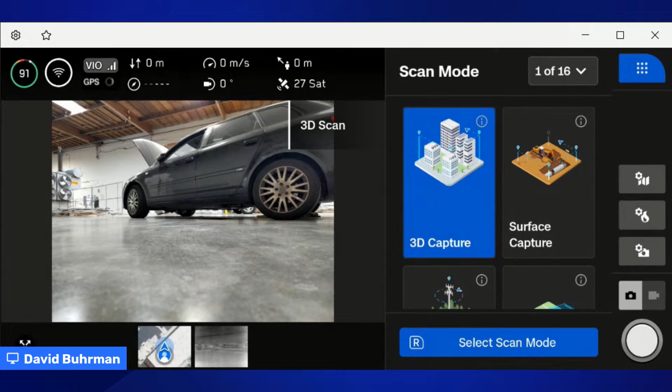Awesome. I'm very excited to talk about 3D capture and how easy, safe, and affordable this is to use. So many things you can do with this to speed up the capture of your scene and get an accurate representation. So what my partner Dave is doing in the warehouse right now, he's labeling this crash scene.

Normally, as a crash reconstruction person, you would want to put your case number or description there of the scene that you're about to capture. So Dave's going to go ahead and lock that in, and we're going to move forward through the mapping menu here.

So Dave's about to launch the aircraft. The aircraft's going to do a quick 360 calibration turn, and now he's going to be able to go right into the return behavior. He's going to set the launch point. Now he's going to set the floor.

A lot of ways you can do this. You can use the default. Dave right now is setting a custom default. He's lowering that floor below the level of the vehicles there. So by dragging that artificial horizon down, he's able to make sure that the cameras are going to capture everything at the ground level, all the way down to the wheelbase. So if there's any crush damage along the side, that's going to capture in each one of those photos.

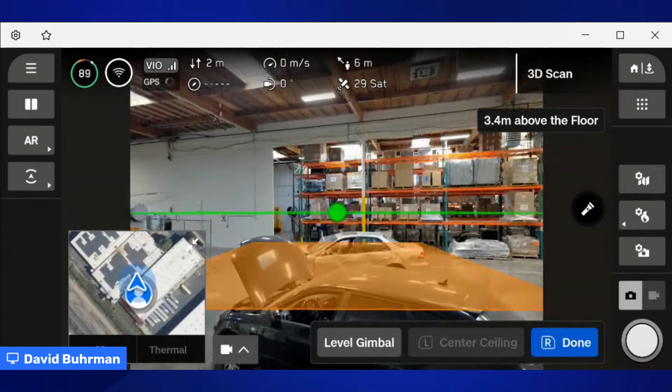So now Dave's going to set the ceiling height, and all he has to do is fly just above the height of the vehicles. He can raise and lower that depending on the environment he's in, if you wanted to get greater context of a taller vehicle, anything like that. So he's got that locked in. Now Dave is going to set the boundaries, very simply, dropping a number of pillars all the way around your scene.

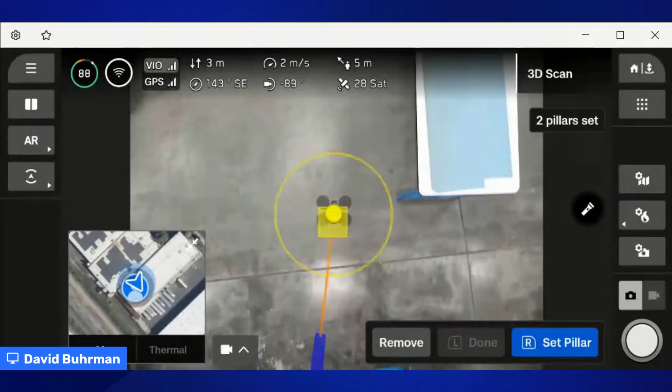3D scan requires a minimum of 3 pillars. However, Dave is probably going to go around and set a number of pillars to ensure adequate coverage and that we're not encompassing anything that doesn't need to be in the capture. So while he's doing this, we're ensuring we're getting distance away from the vehicle, but also getting all the detail we need, nothing additional that's unnecessary in the scene. So he's locking that in. Looks like we've got about 6 pillars now, 7, and he'll be done momentarily.

All right, so we've got a completed perimeter setup right there. Now, if Dave needed to, he could extend that volume outside of what he just dropped those pillars to, but we don't need any additional area outside of that for context. So now we're looking at the strict geofence.

If we had active traffic nearby or overhead on an overpass, we could set those various ceilings, floor, or wall to ensure the drone doesn't pass outside of that space. Dave's got a safe distance of about 2 meters away from the vehicles and other surfaces there. He can set that up or as low as he needs to ensure the drone stays away from potentially blowing away any evidence with prop wash.

So we're going to leave those geofences off. He's going to move right into the review suggested augmented reality observer point, very easy to do. The drone's going to give us a quick glance of where things are at. You can also set it manually for your preference and see that view of the entire capture area while the drone is flying.

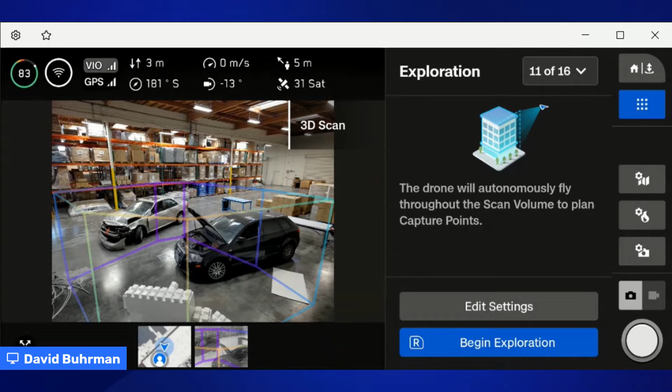Now that he's got that set, we're going to go right into begin exploration phase. This is the point where the drone flies around the crash scene and starts building a mesh, making calculations and decisions on how much data we need to capture to achieve the ground sampling distance we need for the level of detail we want in the final rendering.

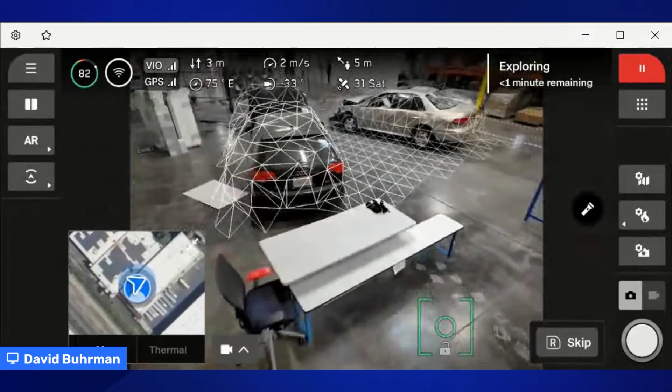So now the drone's nearly complete doing that. We've got a little printout here showing the drone is going to capture about 123 photos, 1 battery flight time, and we can go in and change any of those settings. We've got 1.0 millimeter ground sampling distance, that was in that top corner. So if we needed to, we could adjust that. Dave can also dial that distance to surface up and down to change the ground sampling distance.

We've got good 70-80 overlap in that middle figure there. That's typical for most crash scenes. You could even bump it up as high as 90-90 if you needed to, but Dave can keep that down at 70-80, and we'll have adequate coverage for our model here.

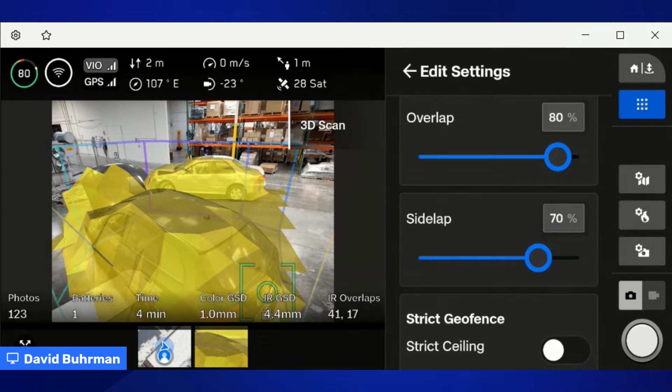Again, you've got the option to click on those strict ceilings, strict floors, strict walls for geofencing in case you've got active traffic in another lane adjacent to you and want to make sure the drone doesn't fly over there where it doesn't need to be. And then obviously your safe distance.

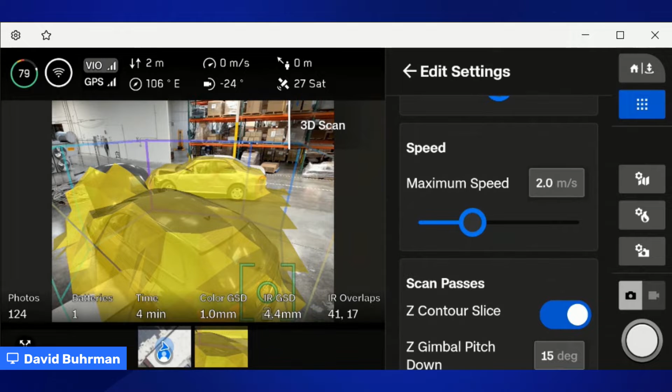We also have the option further down to adjust our speed. Right now at 2.0 meters per second, this is probably typical. You could even lower it down a little if you needed more time in between those captures. You can also change your Z-axis pitch, your Y and X contour slicing within that scene. So if you've got a lot of vertical surfaces like the side of a semi, or the top side of a vehicle with additional evidence up there that needs captured, you can turn those on or off.

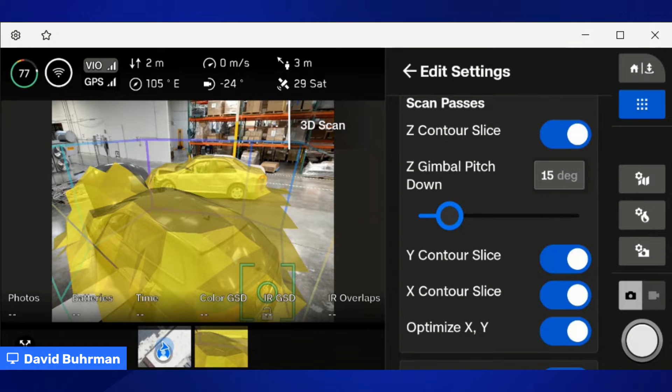Rolling down a little further, taking best photo. I think this is always kind of a no-brainer, but you can set this for stop for photo as well. Having that stop for photo option gives you a little extra clarity on each one of those photos if you decide to set that, and that's going to help keep a clear image of your final rendering.

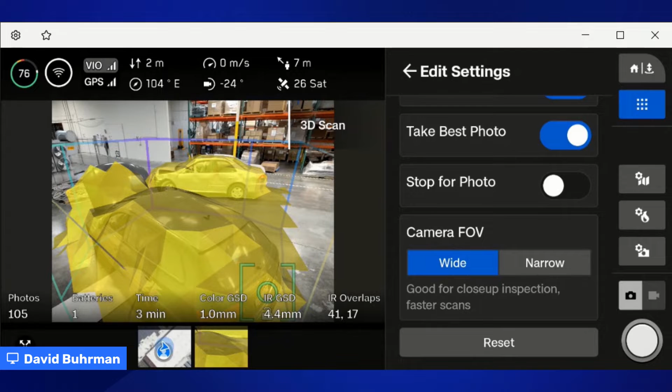And then obviously the camera field of view, if you want to use wide or narrow. This is good for close-up inspection and a faster scan with the wide angle setup here. So I think we're all set to go. Dave's going to hit begin on the scan.

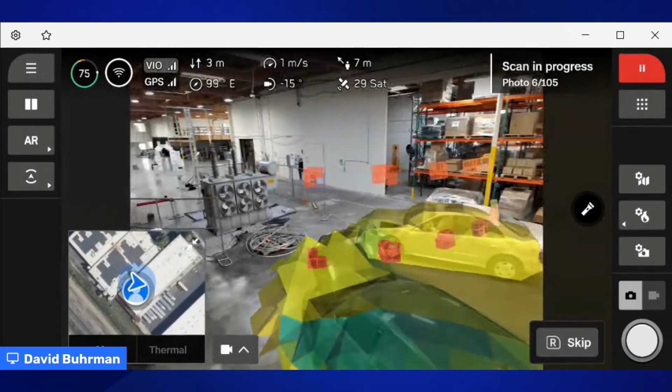So now the drone is going to start doing its initial pass. The drone will actually start to make a circular pattern around the vehicles, capturing that area. And as you can see, that yellow mesh is actually changing colors now.

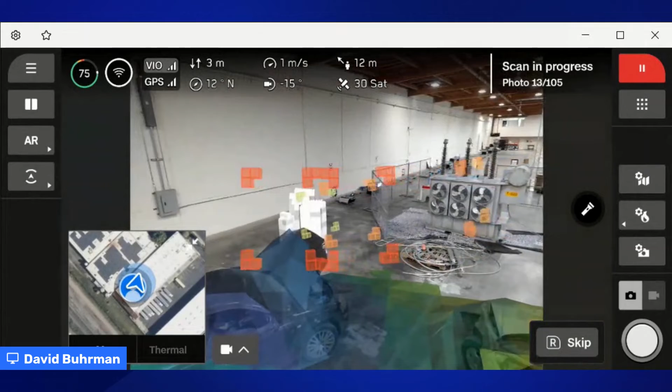It's starting to go from yellow to green to blue, and then eventually it will change that color up to purple, showing saturation of photos in that area, ensuring that you've got good coverage within the boundaries that you set earlier with those yellow pins.

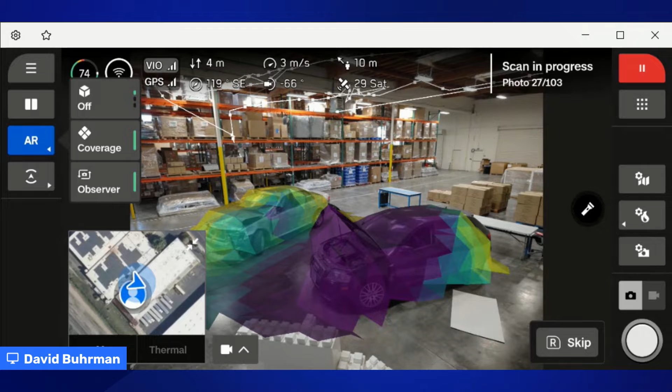And as the drone is going around, we're already moving through, we've got about a third of the photos already captured. X10 is extremely fast, and so is X2 and S2 at doing this 3D capture. So the platform works the same on all of our drones. Very easy, very safe, and this ultimately saves you time, and time is money.

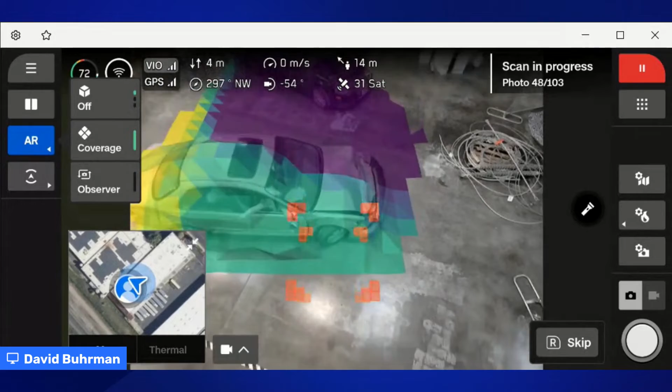We all know that. So clearing the crash scene and getting a fair and accurate representation is the most important component here. And then obviously officer safety and the safety of all the first responders affected there in that crash scene. We want to ensure that we're minimizing the time needed there to capture the data and get good quality data for our final rendering. Ultimately, this data could go to court, and we want to ensure we have an accurate representation of that crash scene.

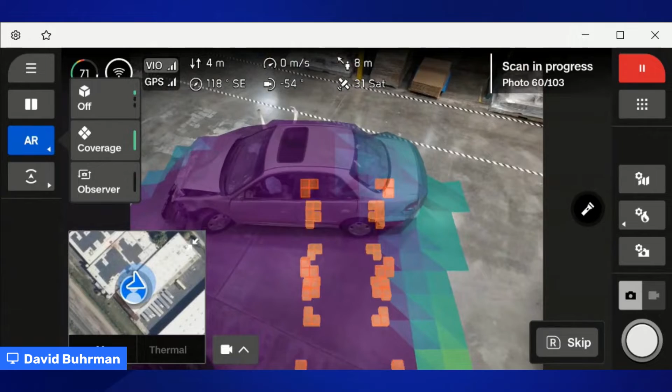So right now the drone is starting to make its final pass to get around. Once it completes this final run here, it will make a 90-degree turn and start making continuous lawnmower passes in the opposite direction, at a 90-degree direction to where it's traveling now.

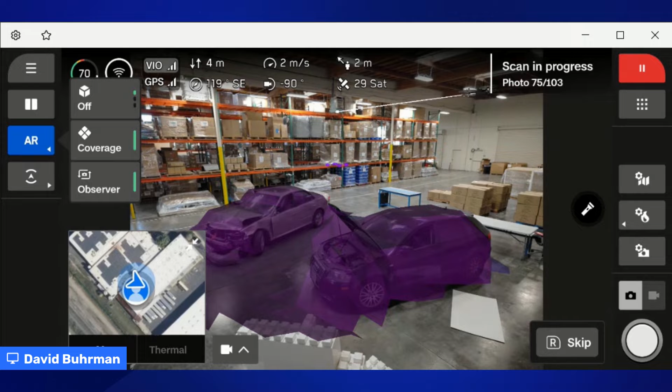So all the while this is going, Skydio Autonomy is acting in the background at the same time. There are 6 4K cameras, 3 on top, 3 on bottom of the aircraft, that ensure the aircraft is staying safe away from objects with 360-degree obstacle avoidance. This is all done in the processor while it's also capturing all this data and categorizing it with the correct telemetry, GPS information, and ensuring we're getting good, accurate coverage and good overlap of the area here.

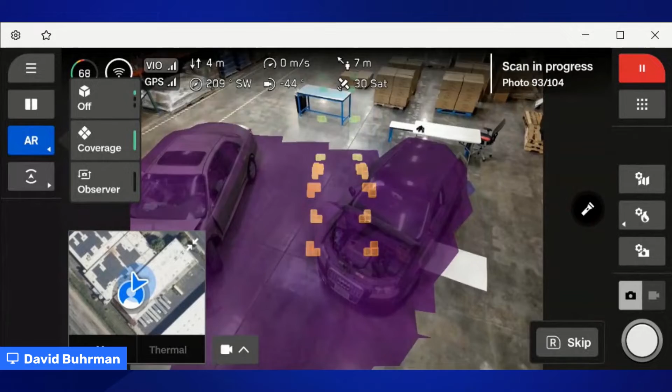We can see now that we're reaching near total saturation, there's just a few little areas left that have not had a photo taken, and the drone is still going at it here. We've got just about 10 photos left, and then it'll be sped up here in just a moment. We'll be done, and then we'll see that we've got a good model coming out of this momentarily.

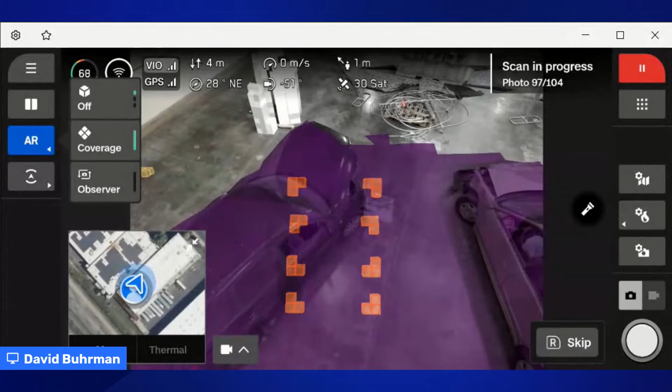One of the great things that has come out here with X2 and X10 is that we've got the ability to ensure we've got coverage after we complete the scan, so that you're not returning to the office later on to do your final orthomosaic and discover that you've got voids. And we've got the ability now to build a model right on screen and be able to determine, did we get adequate coverage? Do we have everything we need?

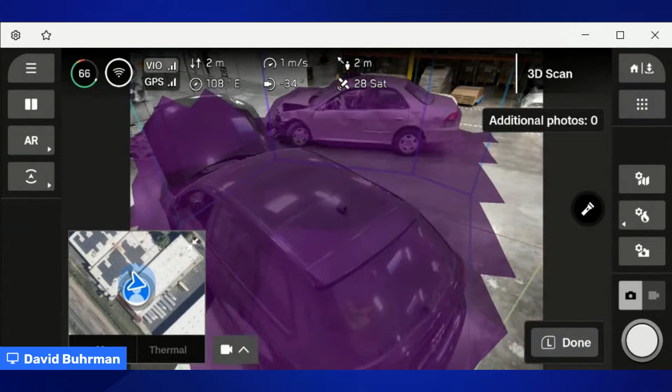So now that we're at this point, Dave has the option. We've completed the automatic run of photo collection. Dave has the option to take manual photos. If he needed to, he could select that and zoom right in and maybe get license plates or additional crush damage, or look inside. And there's Dave giving us a wave.

Dave, I think we're done. We've got everything we need for this rendering. If you want to go ahead and land, and let's have a look at the model when you get a chance, sir.

Matt, I just want to jump in for a second, just to make sure that everyone's aware. Dave wasn't actually manually flying any of this.

3D Scan makes it possible that once you've set your settings and how you want your scene captured, it does it all autonomously. So you don't have to be an expert pilot. You don't have to sit there thinking about every single image you want to take. You kind of just set everything up and then let it go. And then once it's done, you can bring it back and process this onboard model, which is what you're seeing on the screen now.

Matt, I'll ask you a question that came in. So how do the side lap and overlap impact both the speed and the quality of the data that we're capturing?

Certainly. So side lap and overlap goes into your ground sampling distance calculation. Side lap and overlap is that overlap between photos from side to side, and then your overlap from the front to rear in each one of those passes where the vehicle is making overlapping photogrammetry, so that we've got good coverage, ensuring that we've got detail in every crevice of those vehicles and on the side, particularly in the crush damage area. We want to ensure that we've got the highest ground sample, or particularly the lowest number in that ground sampling distance, to ensure that we've got really good coverage and that the detail in our final rendering is very crisp and can be interpreted by anyone in a courtroom.

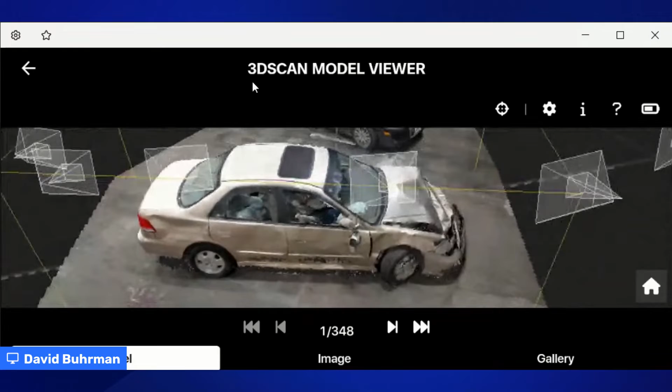But Dave's got our image pulled up already. Just take a look at this. We can see that we've got a really good looking model between those two vehicles. We can see all the crush damage on the front end of those two vehicles, and we're able to see all the angles from which those shots were taken within that scene, and we can measure within that scene if we need to using a post photogrammetry engine.

Yeah, I think onboard modeling is super exciting, right? You can see exactly what you've captured before you leave the scene. With a lot of other technologies out there, you've got to kind of cross your fingers and take that data back to your computer or back to the office, process it, and then hope you got everything that you need. But in this case, you have the ability to confirm before you leave the scene that you have everything you need. And if you don't, you can just go ahead and fly an additional scan or add extra images to what you have there.

That looks great, Dave. Great job, Dave. Yeah, being able to manipulate this model at the very end of the scan is a real time saver here, and it's a very assuring component that we've got all the data that we need before we leave the scene, because once you tow these vehicles and disturb the original context of that scene, it's very difficult to go back and get that level of detail.

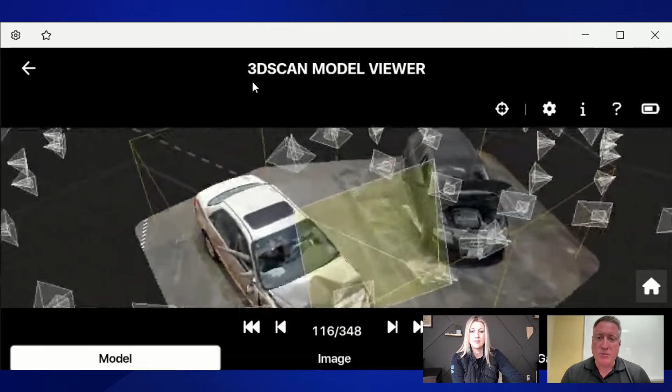But now with a completed model, we know that we've got everything we need within the scene, and we can reasonably go ahead and tow these vehicles, get them out of the way, and get traffic moving again. We can go back to our office and load that data into a post photogrammetry engine of any type, because our data is agnostic. It can go into any engine, and we know that we're going to get a high quality orthomosaic or 3D model that we can use later on for prosecution or validating who's at fault, or if there's no fault in this, at least be able to make that determination.

Yeah, and I do want to add with this onboard model, what you're seeing is a textured mesh that is created right on the controller for the X10. That is the drone that Dave flew for this data capture.

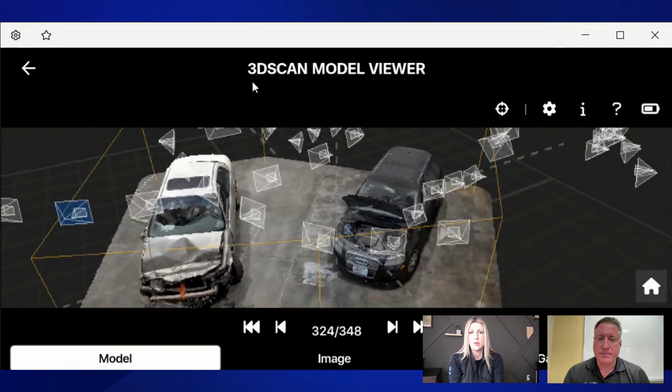And if you wanted something that was more of a point cloud, or something that you could do a little bit more with to use in animations or other types of reconstruction, all you're going to do is take these exact same images that he captured in the 3D scan and take that into your photogrammetry engine of choice.

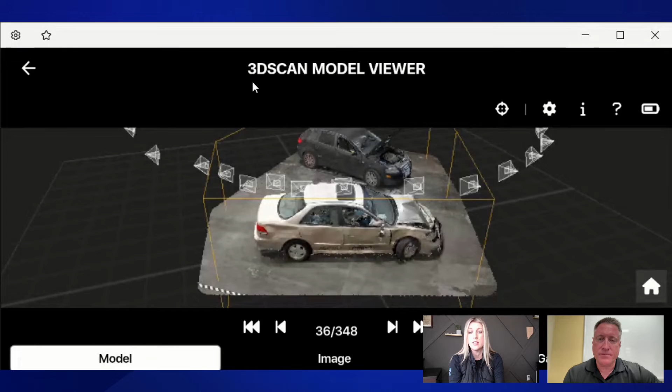Additionally, and I know you mentioned crash photogrammetry, on my travels with law enforcement agencies across the country, I feel like a lot of crash and crime scene teams are limiting themselves to just the 2D images from a drone, which is great. You can get a stitched together orthomosaic image that can stand as a basis for your 2D diagramming, but you're really missing a huge portion of the deliverables you could be making for court by just using these images in their 2D form and not converting them to a 3D point cloud or a model, such as what you're seeing here. So there are a lot of other things, and we'll go through some of those here in a moment, that you could be doing with these images if you aren't already thinking about it.

But this onboard model is new and unique to Skydio and something we're all really excited about. So you could take this off of the controller, off the drone, and then place that into additional forensic software to complete your diagrams or whatever else you're looking to do.

Yep. To your point, Noreen, we definitely are seeing a lot of crash and crime scene teams sticking to just using that two-dimensional capture when you've got three-dimensionality here and the capability to get that full context of the scene.

And there is nothing more important than being able to, at the end of the day, if this goes to court, show a judge and jury and walk them through that scene, literally having the ability to fly through it and show them in full rich detail all the side angles and everything that's happened at that scene, not just a bird's eye view from directly above.

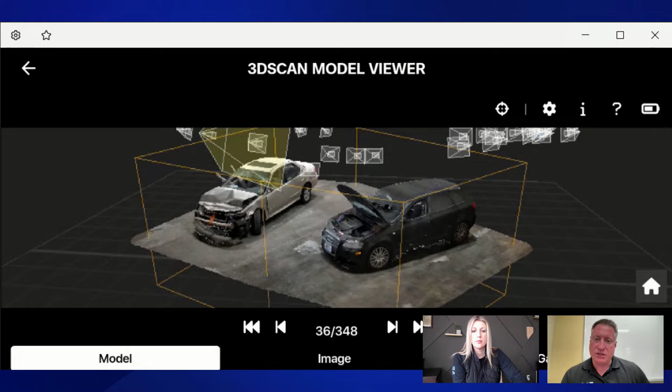So the benefit of 3DScan is that you have those oblique angles, the very sides where the crush damage occurred, and that's the most important thing, to give the judge and jury a fair and accurate representation by giving them that three-dimensional analysis.

And I do think drones have been embraced a lot more with crash teams than they have with crime scene teams. As much as I loved hanging out the side of a helicopter to photograph an officer-involved shooting or a homicide investigation out in the desert to take images of it, drones are really just more efficient and effective. It's not this big scene to get up to your air unit and into the helicopter and get to that scene and everything else.

So a lot of crime scene units are now really incorporating drones into their toolbox as well, for this exact same thing. You're flying it at outdoor scenes to capture your data quickly. Think about a shooting investigation that spans a long stretch of roadway or maybe blocks, with cartridge cases everywhere. It's really easy to just fly that drone and capture this data.

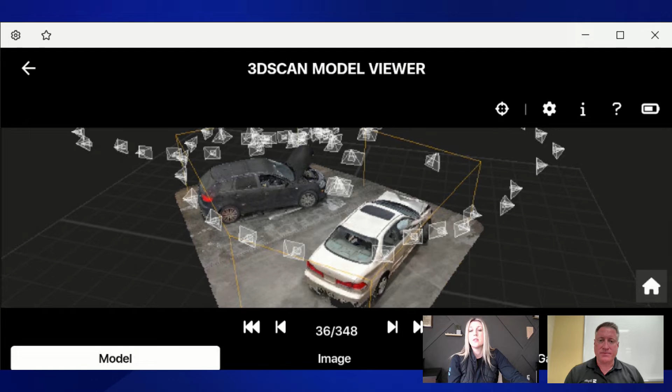And within minutes, you saw how quickly we were able to capture both of these vehicles. Within minutes, not only have all of those images been captured, but we're also able to create the model like you're seeing here on your screen.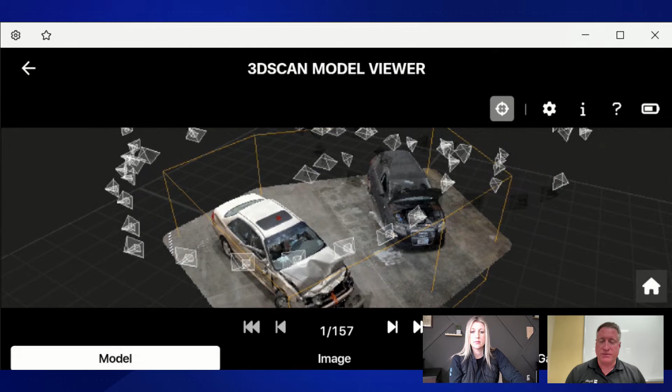Yeah, we're seeing a lot of the crash units out there adopting the drone mentality and getting the quick capture, getting good data. And we're also finding that it's affordable at the end of the day, because you're saving time, saving money, and saving resources of your agency and those of other participating agencies, getting folks out of harm's way on the road and ensuring traffic keeps moving, while at the same time getting accurate data that we need to recreate those scenes in three-dimensionality. So these crash units are adopting the drone model and using that, and we're also seeing a lot of use of that data to get the results that we want.

Matt, I know you do a lot of work helping our agencies get up and running with this. Can you speak to the training required for 3D scan? Is it something anyone can learn in a short training session, or does it need a lot of technological understanding and practice, one of those use-it-or-lose-it skills?

Sure, so 3D scan is really easy to learn. It takes just a matter of minutes to learn the walkthrough of the menu and understand how changing those ground sampling distance values can get you the greater detail you need. Most people could relatively pick up a Skydio controller, turn on 3D scan, and be up and operating within the hour with a good understanding of how it works.

It is really simple to use. I would put it at just as easy as turning on your camera on your iPhone and going to start snapping photos. It's very easy to follow that menu and understand how it's going to achieve the values you need and create those models, really speeding up your investigation and giving you quality results you can depend on at court time.

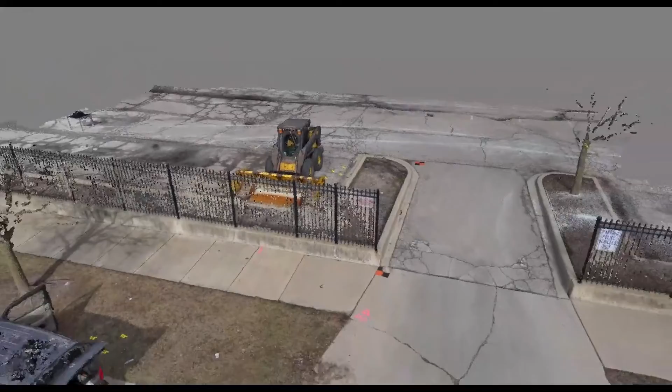I took all of those images and imported them into FARO Zone 3D Expert software. At medium quality, because there's different quality you can choose, it took about 50 minutes for my computer to process all 305 images into the point cloud that you're seeing on your screen now.

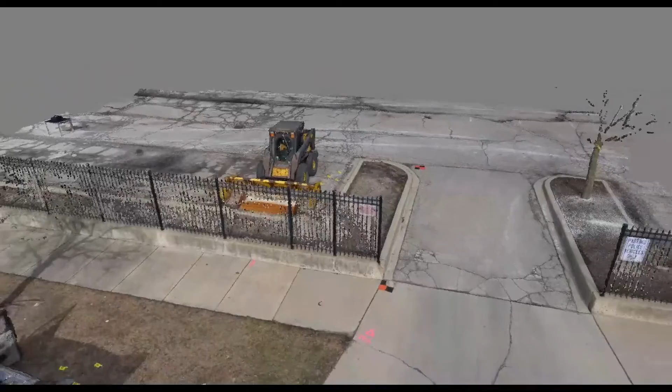And then I just created a quick fly through so I could show everything that was captured for this particular instance. So you can see the evidence placards, you can see the vehicles. He even added some evidence placards inside the vehicle, as well as one kind of tucked in underneath the front of the vehicle, the front right corner. So you can see all of those really well.

And this was all just captured with 3D scan. So he set up his scene, he set up the parameters just like you saw at the beginning of this live demonstration. It went and did its thing and came back, and he had the 305 photos. So that's great - you can have this 3D point cloud.

You can create a fly-through video like I did here. You can set up perspectives if you needed to. So if there were conversations about what someone could or couldn't see, you would be able to show that, because now you have a 3D environment from those 2D images that were captured with the drone.

If we go to the next slide, Kendall, real quickly, I just pulled out some measurements. Now, when I processed these images, I just did it based on the GPS coordinates that are built into the images when they're captured. And then I was told that they had placed down these essentially ground control points - one was at 50 feet distance and the other was at 25.

So real quickly, I just pulled a measurement in the software to see how close I was to their known measurements. There are other ways that you can scale your point clouds - you can do it by known measurements in images prior to processing, or bring in ground control coordinates from total stations. There's all different ways you can do it. I just did it the easy way, based on the GPS, and these are the measurements that I got from that.

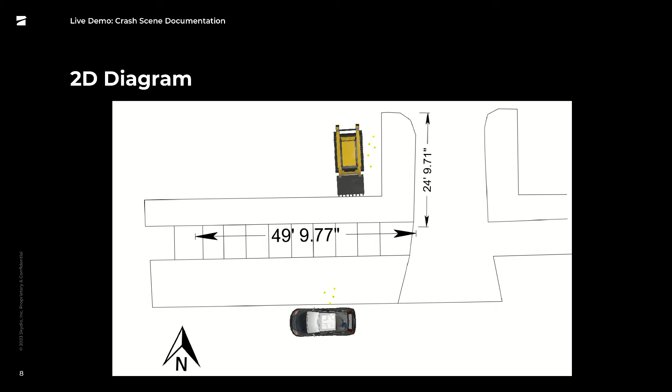So just kind of an example of the deliverables that you can make with just capturing these images and the 3D scan. Looks like we have a question, and Matt, how do you manage the photos and the data? Does Skydio integrate with other evidence platforms?

Yeah, so managing the photos and data, you've got several options to offload the data to your computer for use later on. You can use Media Sync if you've got Wi-Fi back at your home station, and that's where the drone will actually upload through an API connection right to your cloud or up to a third-party photogrammetry engine or to a file system.

Perhaps you have Axon evidence.com, or you've got another photogrammetry service that is able to ingest all the photos. You also have the option to take the SD card right off the aircraft and put it into a card reader and load that locally on your computer.

And then you also have an auto-generated CSV file that's included with those photos that you can use as a key in some of those post-photogrammetry engines to ensure that you have the proper alignment of all the X, Y, Z axis, everything - all the telemetry data that is ingested in with those photos.